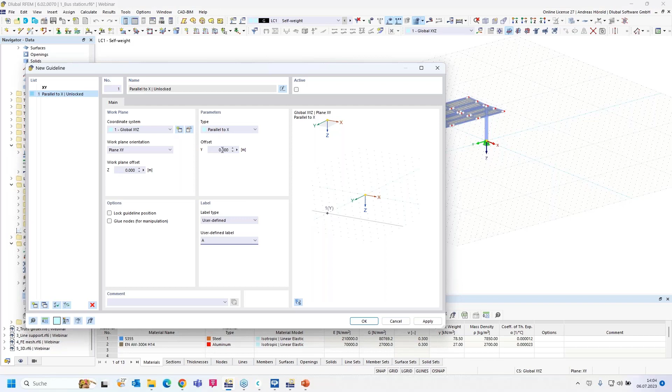So okay, we start with the first guideline. We call it A, parallel to X, and we start with an offset of 0. Apply, and you can see in the RFEM window that the first guideline has been created.

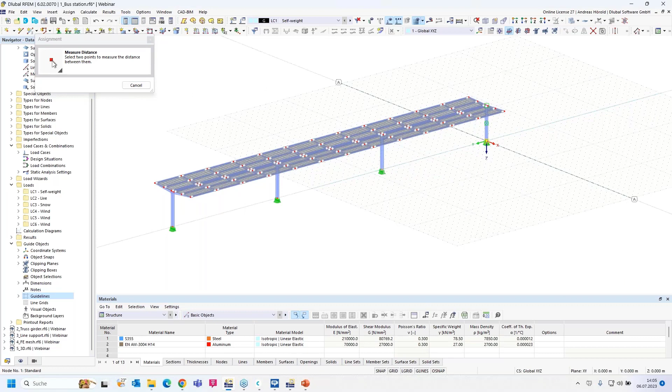We activate it, and then we copy the guideline, and we have to change the offset. Let's measure the distance between the two columns here - okay, 18 meters - and we have to rename the guideline. Apply. Then we create the other guidelines with the same workflow, 36 meters.

And we rename the guideline. Apply. Then for the last guideline, I change only the offset and the name. Okay, so all the guidelines in the X direction are created.

Now you can see the distance between the name of the guideline and the node is very far. You can change that - for example, when you change the grid, by a right click you can press edit, or I'll leave the dialog and show where you can find it as well, under Tools, Work Plane, Grid/Snap, and so on. Okay, then you can enter distances here.

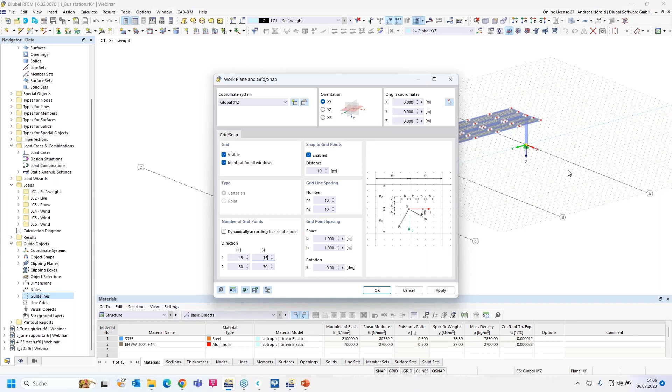15 plus and 15 minus in the X direction, and for example 70 and 10 in the Y direction. I apply, and you can see the name has been moved to near the node.

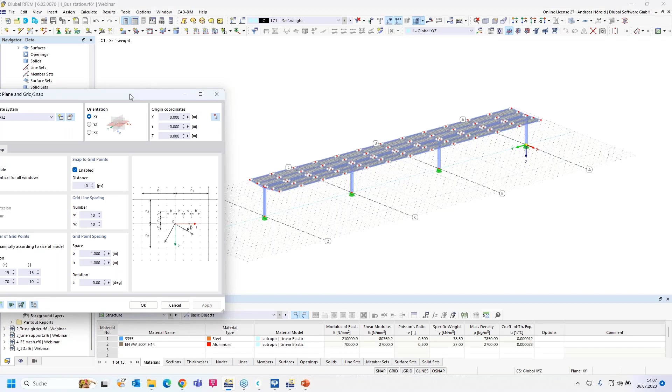You can also check dynamically according to the size of the model. Let's do that, and you can see that the number of grid points are created automatically.

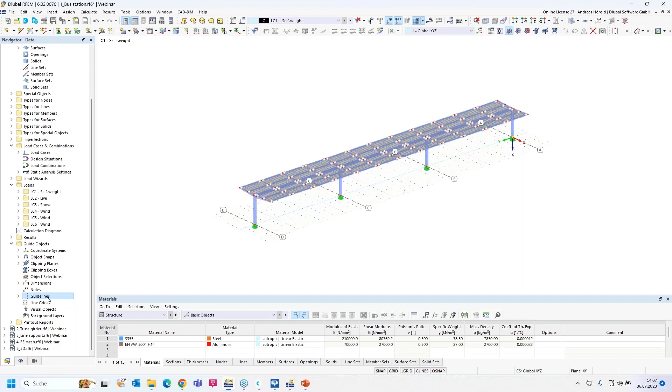Now let's create the last guideline in the Y direction. I create a new guideline, parallel to Y, offset 0, and a user-defined name - I'll name it 1. Apply that. Now all is okay.

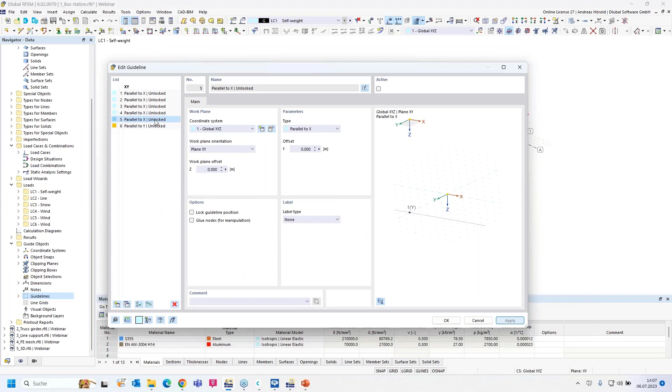No, this one is not correct.

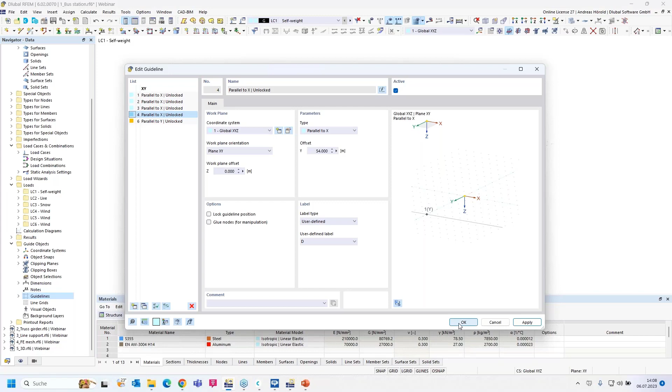Now you can move, copy, or delete all the lines here, or certain lines. Now our guidelines are created. Just an example. So then we turn to the next model and the next question.

Next question is, I came across the area of load application setting in the load wizard. How does this setting affect the magnitude of the load in my model? So this is a load that has been created with the load wizard. I double click on it, and you can see that dialog.

And how you can create such a load, I will show that. First you have to select, in the base data here at the top left, under add-ons, the load wizard must be activated, but this is a default setting. The combination wizard and the load wizard are selected by default.

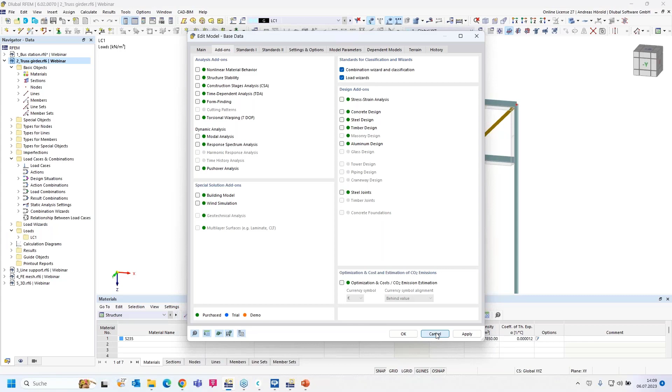And then here on the left side at the top, insert, there are the load wizards. There are different load wizards: member load from area load wizard, for example. This is the load that I created before, which you can see in the model. There are also the snow load wizard and the wind load wizard, for example, among other wizards.

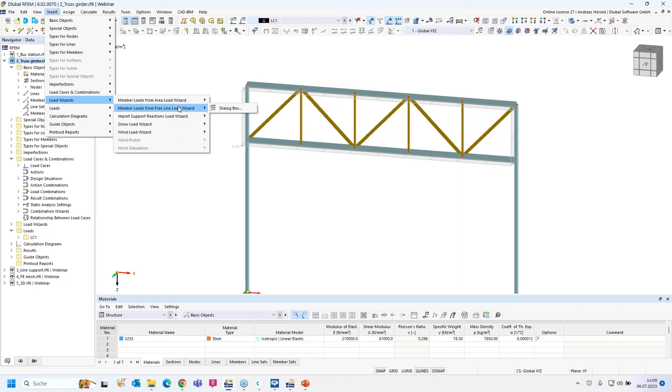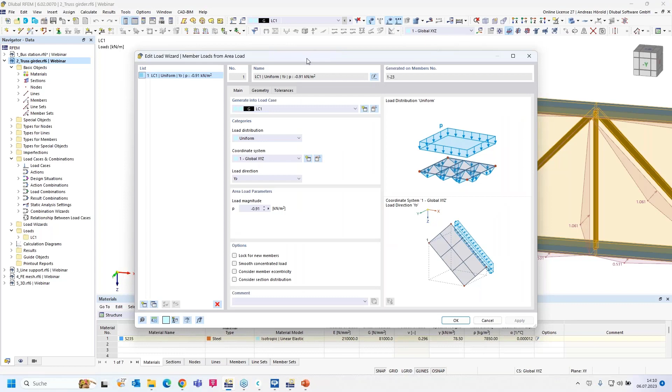Okay, I double click on it, or let's display it separately. Now with a right click, I can display the loads separately. So now I double click on the load and open the dialog. And under geometry, you can see this setting: fully closed plane.

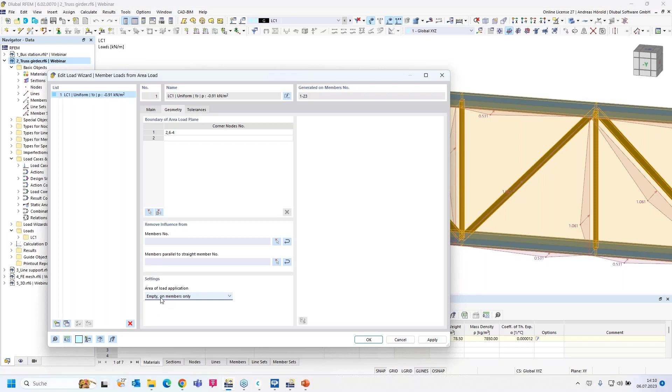The complete area, for example a plate or the trapezoidal sheet over the members, and all members get a load, and the wind can affect the full area here. So if you want only the members to get a load, only this small area, then you have to select 'empty on members only'.

We can see that at the moment the vertical and the diagonals get a load of about 1 kilonewton per meter, and if I apply that, you can see that the load has been decreased. Only the members are affected by a wind load.

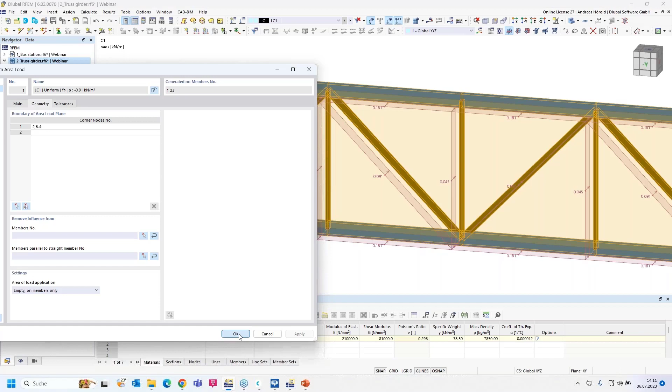So if you, for example, change that member—at the moment the width is 10 centimeters or 100 millimeters—and if I rotate the section, for example 90 degrees, you can see the load has been decreased from 0.1, as for this diagonal, and now it's only half of this value.

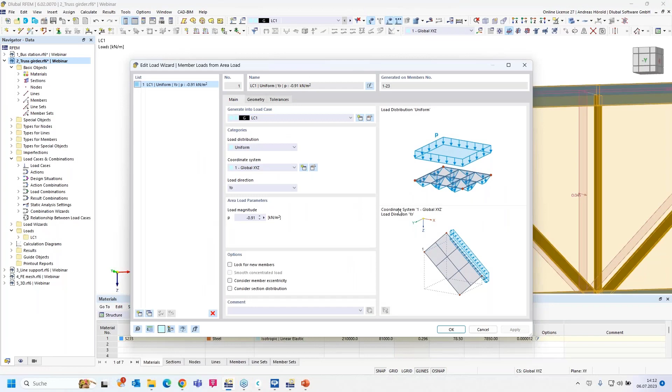Okay, that's the setting. I changed that back, or I press undo, and you can see now the load is 0.1, or about 0.1. And I do another change.

Imagine, for example, that a trapezoidal sheet spans from the lower beam to the upper beam, and only these beams are affected by the load or support the trapezoidal sheet. Then you can remove the influence from members parallel to straight members. I select all 3 members, and all members that are parallel to these 3 members don't get a load. Let's try that.

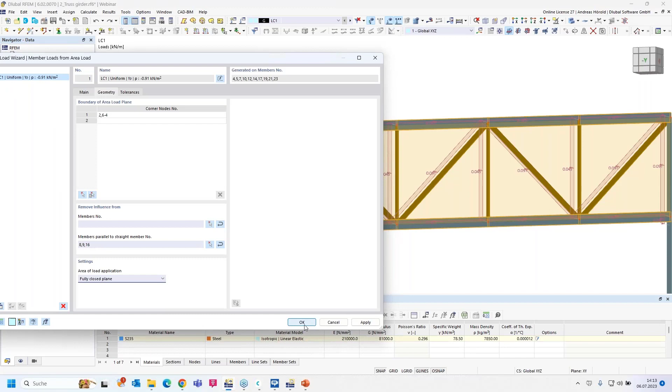Fully closed plane. Okay, so now that's the effect when a trapezoidal sheet spans from the lower to the upper horizontal beam.

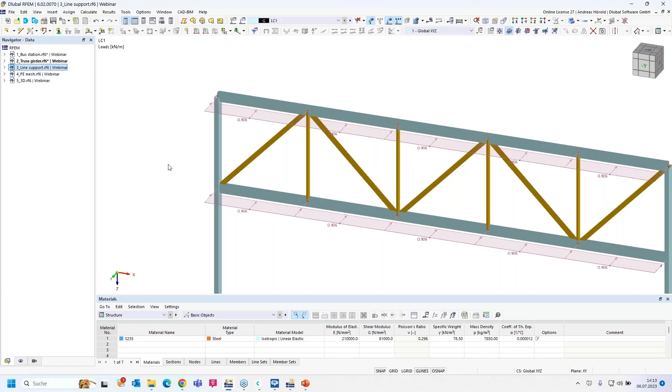Okay, let's turn to the next model and the next question. A surface model, a concrete slab from a building, for example. And the question is, can I get the program to calculate the spring of a wall for line support while modeling the wall at the same time?

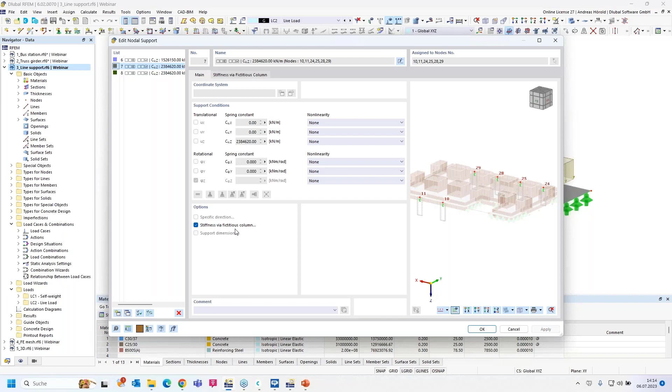Now, in an earlier webinar, we showed a similar function or feature for the nodal supports. Let's double click on this nodal support. And when I press the edit button, you can see 'stiffness via fictitious column' is selected. And when I turn to this dialog...

I can model the support by elastic surface foundation, elastic nodal support, and so on. You can enter dimensions, the height, and so on. Then if the column head is hinged or semi-rigid, and when you change that, the values for the springs are changing.

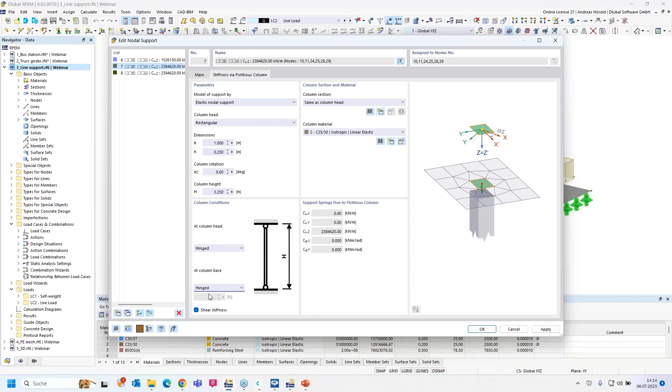Okay, so I leave the dialog, and we have got a similar function for the line supports. I double click on the line support and edit all the used line supports. Now you have to check the stiffness via fictitious wall. In the preview, you can see the walls already.

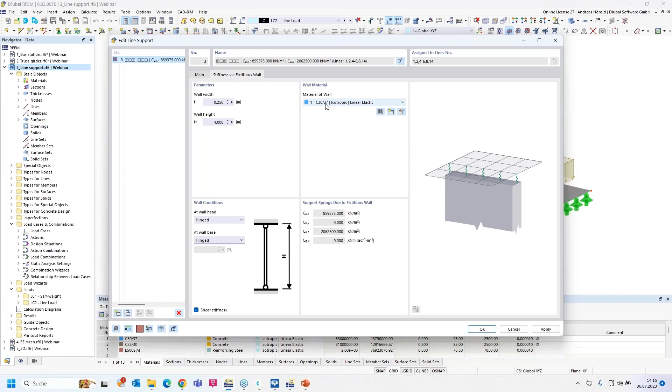So then you can enter a thickness of the wall, a wall height, and also if the wall head is hinged or rigid. Also for the wall base, you can enter a material. I'll leave the concrete material as it is at the moment, and you can see, as I mentioned in the preview, the considered wall.

Okay, and now you can see also springs for the line supports here, and this can avoid or smooth singularities in the FE calculation. That's the advantage. Okay, that should be all to this question and to this model.

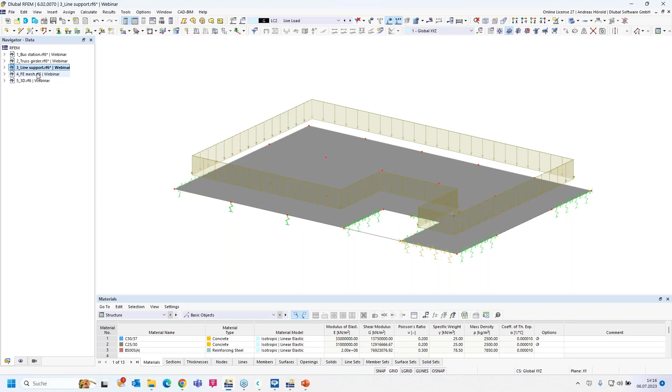We turn to the next model and the next question. And the next question is, how can I create multiple FE elements across the thickness of elongated thin solids without having to create an extremely fine FE mesh? At the moment, you can see a steel plate here with a thickness of 20 millimeters.

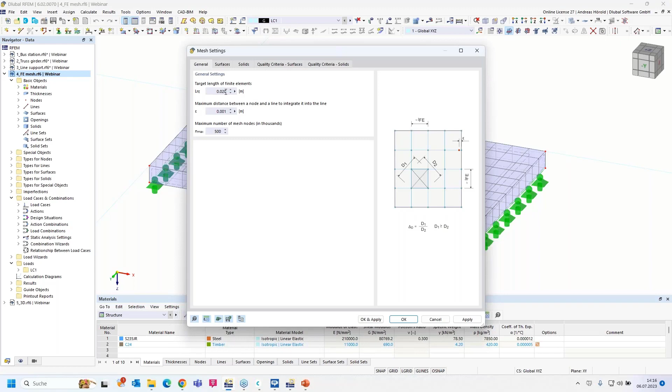I can go to the FE mesh settings. The FE mesh size is 2 centimeters, 20 millimeters - that's the thickness of the steel plate. And you can see for the width and the length, the size of the FE mesh is quite okay, but not for the height. There's only one FE mesh.

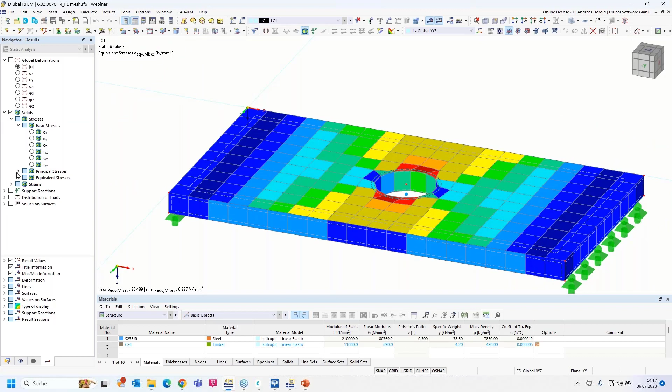You can see that in the results. There's only one FE element, and the results in that case - what's selected, the equivalent stresses, the sigma V Mises - that's not okay.

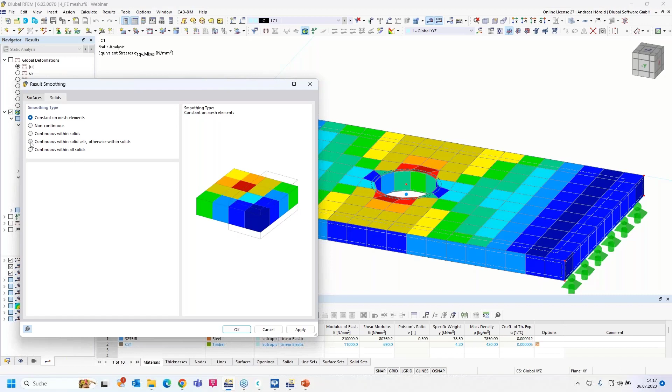For your information, under calculate, you can find the result smoothing, and at the moment there is no smoothing. You can see that here, constant on mesh elements - those are the real results without smoothing. That looks quite better, but those are the real results, the constant on mesh elements.

So I double click on that point here to get into the dialog from the solid. Another possibility would be to go on the left side, the navigator data at the bottom, then open the solids - there's only one solid. You can double click on it or right click and edit, and the same dialog has been opened.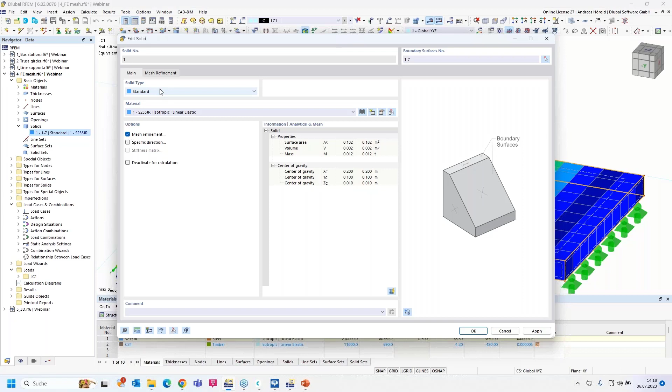So then mesh refinement I selected, and there is a quite new feature, the layered mesh. If you activate it and select one area or one surface, then the opposite surface has been selected automatically by the program. And you can see in the graphic, you can define a number of finite element layers.

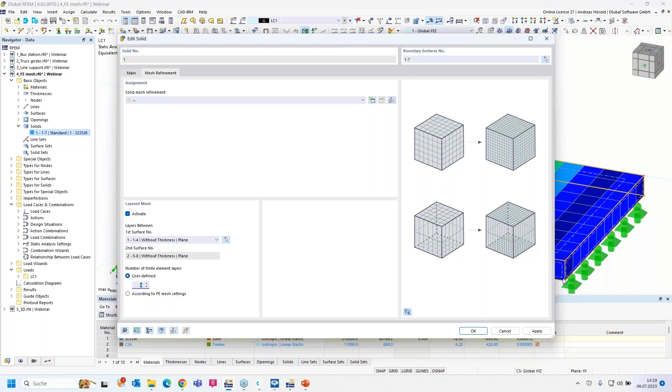So I increased it to 4 - at least 4 or 5 mesh or FE elements should be used for one distance here, in that case for the height or for the thickness. Okay, I apply that. Let's create here at the top.

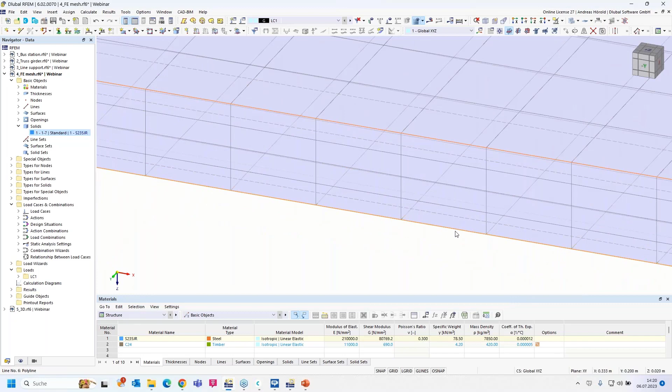We'll generate the mesh. Okay, and now you can see there are 4 elements or 4 layers for the thickness. Let's calculate all again. Okay, that looks quite good - there are 4 elements in the height, and the results are better than before.

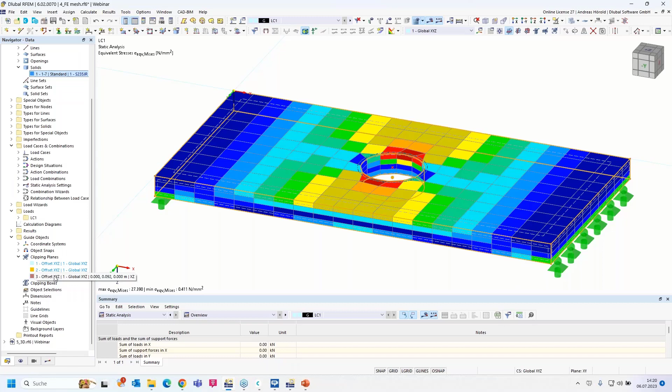Let's go through the solid here with the guide objects with a clipping plane. I activate any plane here, and now you can go through the solid and you can see the results are quite good, good to evaluate.

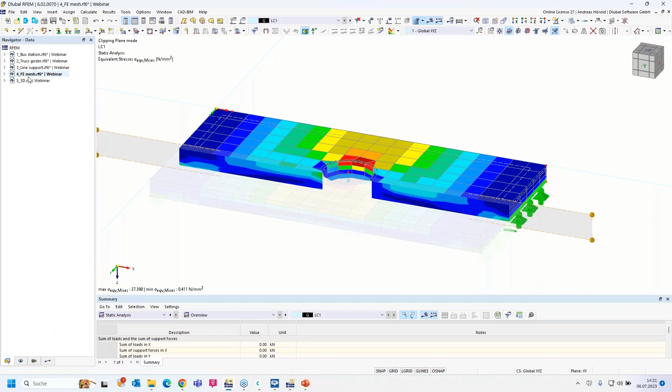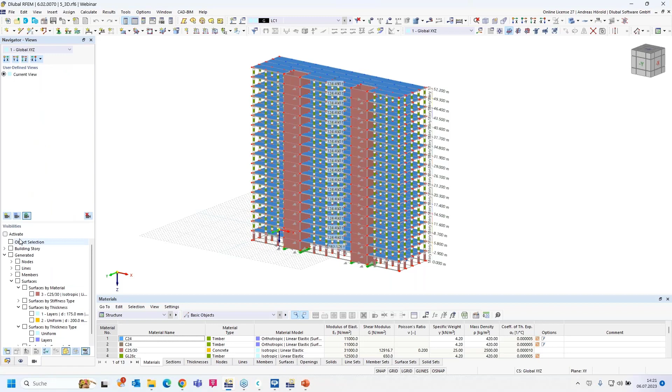Okay, that's all for this model and for this question. And the next question is, how do I customize the appearance of objects in the background? So you can, for example, select only the concrete cores. Left at the bottom, you can go to the views and then activate the visibilities and the concrete surfaces.

And you can see the hidden objects are quite good to see, but a lot of users ask, how can I modify the transparency? So how to do that?

Yeah, you can, of course, completely make that invisible with this function here, show hidden objects in background. You can deselect that and you can see the deselected objects.

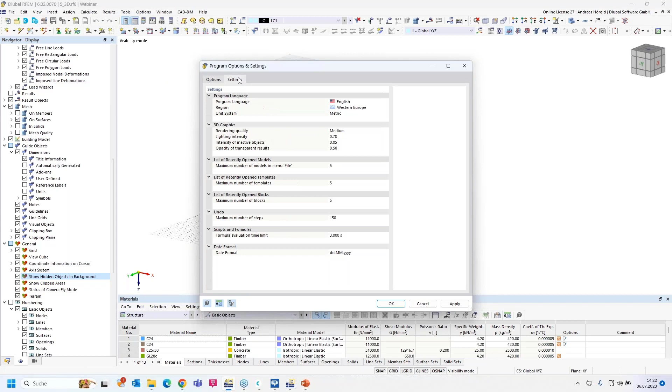So let's change or modify the transparency under options at the top. You can go to the program options, and under settings you can find that setting here, intensity of inactive objects. Now you can increase the number here, apply, and you can see the changes.

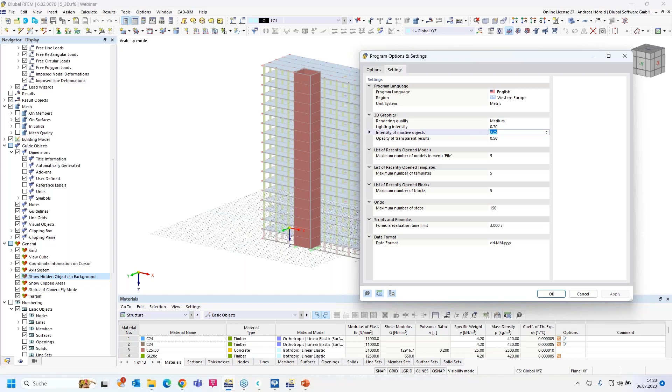Okay, a quite important feature, because sometimes it's annoying when you see all the deselected elements and so on.

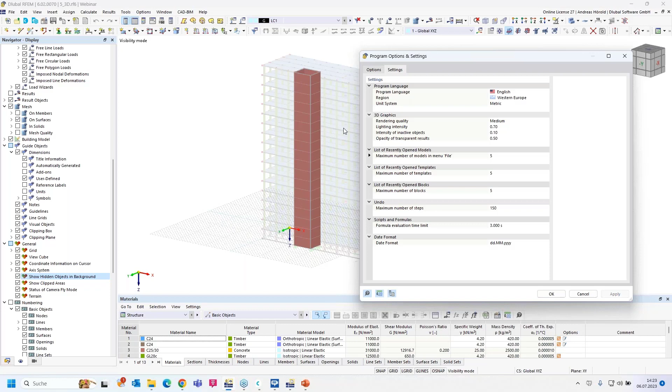Okay, so then we turn to the last question for today. I turn back to the first model, the bus station, and display the results. The deformation is okay. In the model space of RFEM 6, I can exaggerate the deformation according to a factor. How can I do the same in the graphic printout? Or rather, how can I adapt the same factor of the display from the model?

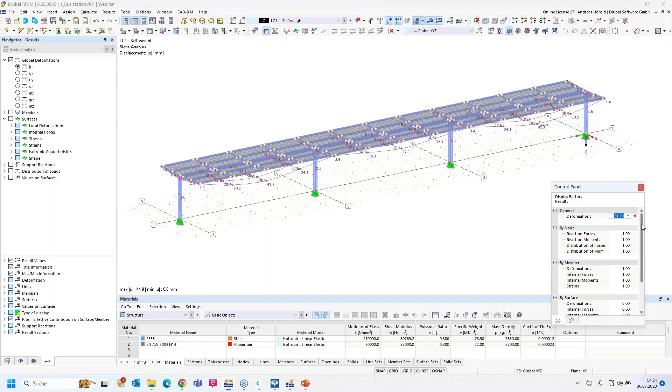So I select the control panel, or display it, and you can change the number here, the deformation factor. You can increase it or decrease it. And the question is, how can I do that in the printout report? So let's print that graphic in the printout report.

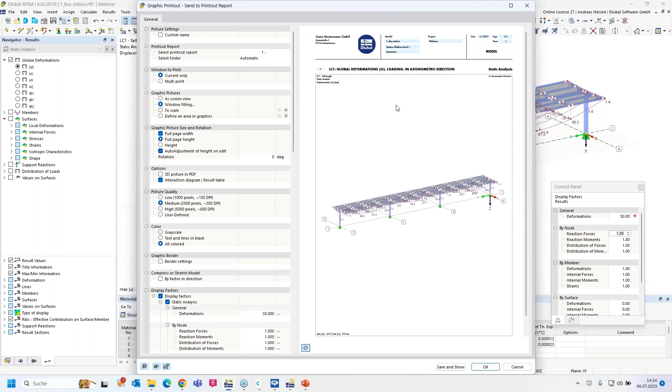Here on the left bottom. You can find the feature print graphics to printout report. And under the default setting, you can select the display factor and the static analysis in that case here, because it's the deformation from the static analysis.

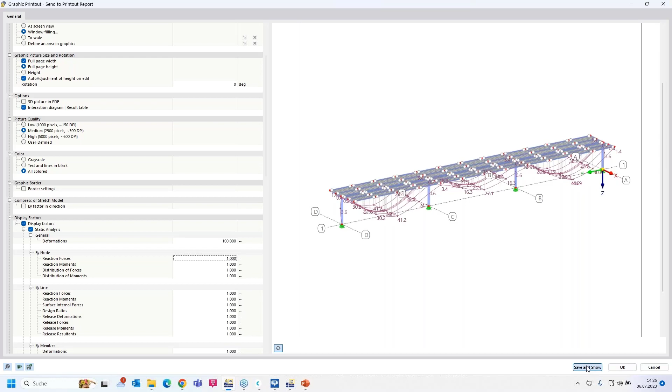So you can increase the number as well, and you can see the change in the preview here. Then we can press save and show, and we can see the graphic in the printout report.

And you can change or modify that graphic afterwards as well. So let's do that. I do a right click on the left side, then properties, or at first I press edit.

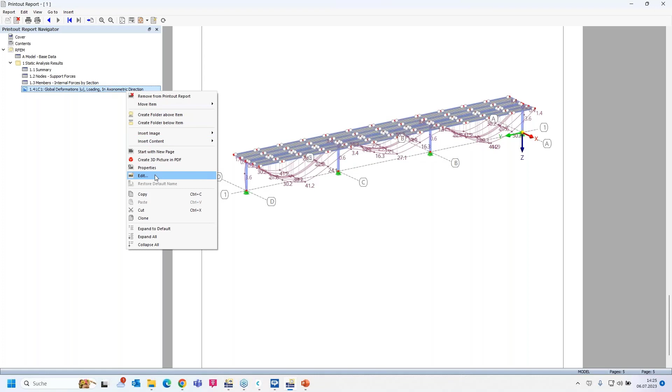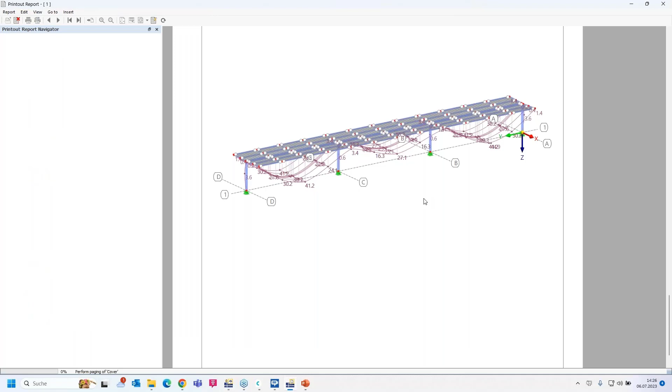Okay, then you turn back to RFEM, and for example, you can change the view, right at the top, for example, in X direction. So then it should be updated in some seconds.

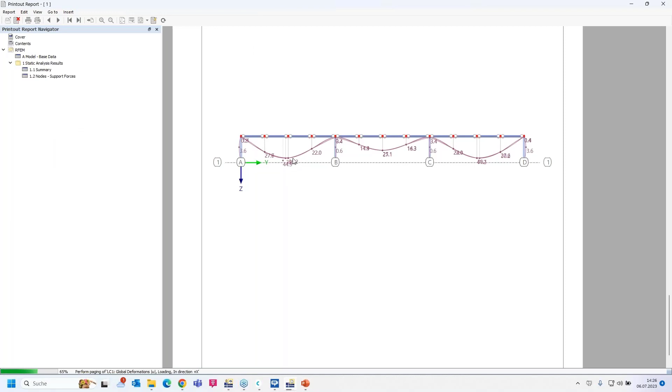And you can also change the properties, for example the deformation factor. Okay, so the graphic should be updated. Okay, now I think a quite good hint.